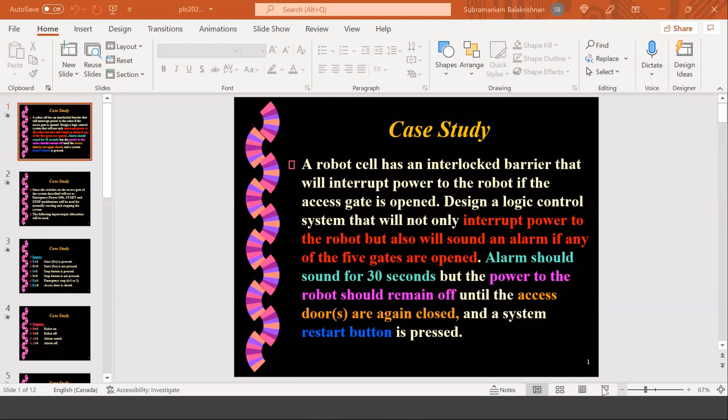Okay, let me go to this. Okay, do you see my PowerPoint slide? It's just loading for me right now. Yeah, now we can see it. I am not sure whether I want to be an IT guy, sort all this out. This is the stuff I hate about the online stuff when I'm using so many different things. It wants to screw me up.

Okay, I'm going to present the last section on the PLC that I did not do as part of my first 3 sets. This is the 4th set. What it is going to show you is how the sequence dependency of the ladder logic may cause problems in only a few cases. So you got to watch out, it could be even your own project number 3. Okay, so let me give you one example.

So basically I have a robot cell. Let's not worry about what's happening inside the cell. Some process is going on and the robot is the principal assembler or loader or whatever. We don't care about the process inside.

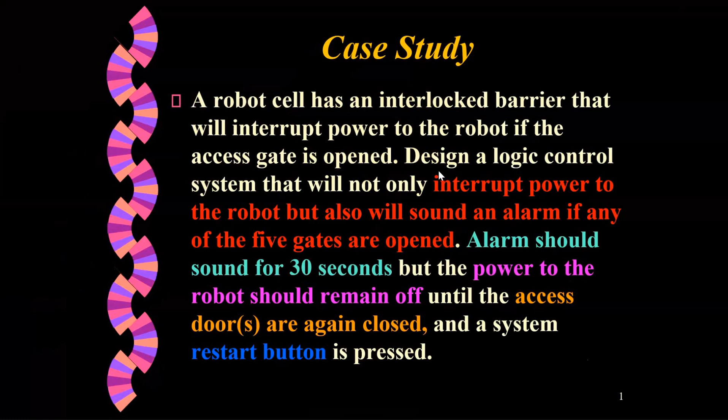Very simple. We are only looking at the safety system in the system. So like before, we are not going to go and do an exotic truth table or whatever. Let's look at what the sequence dependency is.

So all the safety switches are emergency power offs. There are many alarms inside the robot cabinet which can be wired to external monitors. For example, my 2 robots, Motoman, that I'm currently using for undergraduate courses has got close to 484 alarms inside.

In the sense, they're all in the controller. You can wire them up to give you a display, and they have wired them up into the screen, putting out what that alarm is. There is an alarm and it is stopped - what does it mean? So if you know what that error code is, you can debug it.

An example would be: the robot's sensors are constantly powered, like the shaft encoders on each axis are always kept alive, even if you power it off. There is a battery that powers and keeps the memory going. When the battery goes down, typically about 2 to 3 years, unless you wake up ahead of time and as a prevention keep changing the batteries, it will come up with an alarm and it causes a lot of other headaches. So there is a code for it.

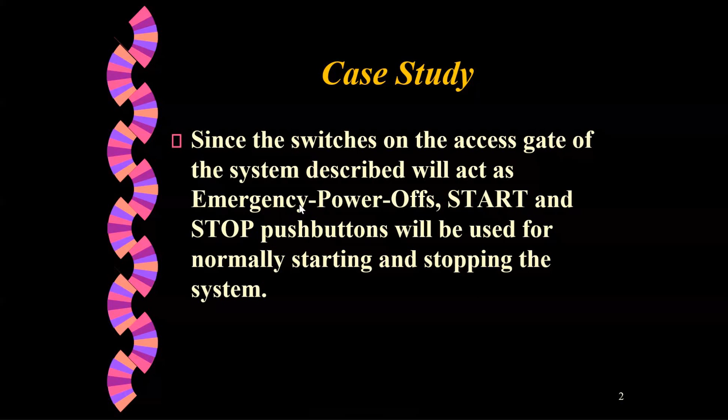Like this, there are many codes about the heating of the cabinet, heating of the controller, heating of the motors, and so on. So quite a lot of alarms are there, but right now we are looking at only one. So there is a start and a stop push button for starting the process normally after a shutdown or whatever.

Okay, so let's look at what the inputs would be. One, the start button, 'go', is pressed, equal to 1. When the go button is not pressed, it bounces back, so this is a momentary on-off switch. Only the go button, which means on switch - I'm going to call it the variable G.

Then there is a stop button. The stop button is independent of the start button, and it has got two states. It's also a spring momentary on switch. S equal to 1 and S equal to 0, again, as it says, pressed and not pressed.

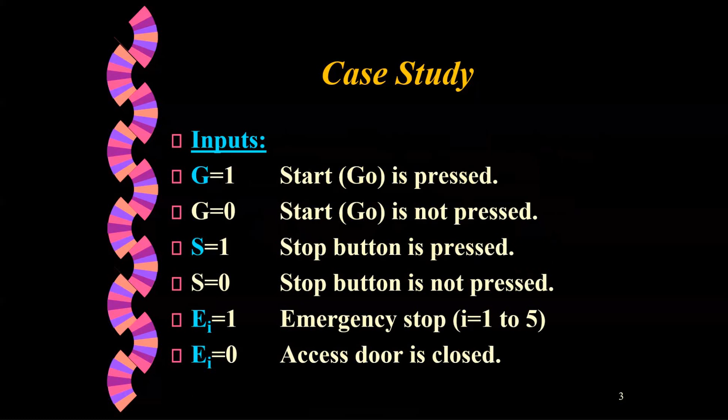Then you have 5 gates, each one has a sensor. So I'm going to call it E subscript I, equal to 1 or 0, and the I would take the values of 1 to 5. Would I be considering more? Well, I can consider more, but right now, to make the problem simpler and to show you the sequence dependency, I'm not introducing more. I'm not even considering the process.

Outputs: I'm going to put a variable R to tell me that the robot is going to be on, equal to 0 when it is off. And I'm going to have the alarm, light or whatever, equal to 1 when it is sounding or lighting up, or 0 when it is off.

The alarm is going to be a net effect of any one of the emergency gates being opened. All that you need is one gate to be opened, boom, alarm should come on.

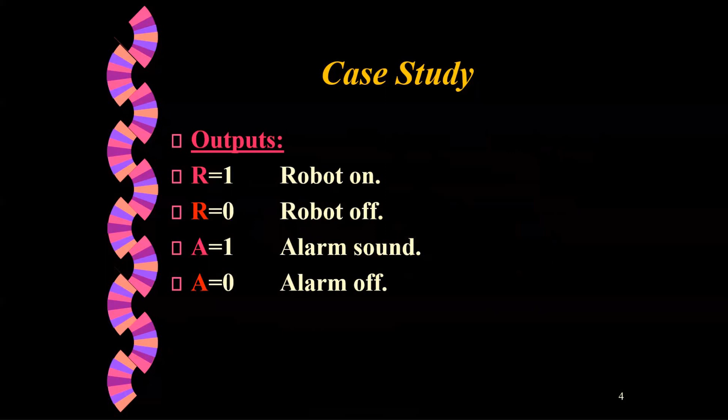I am going to put some internal outputs, and the internal output in this case is going to be a timer, because we said in the opening statement the alarm should sound for 30 seconds and then quit. So I am going to put a timer as an internal output, equal to 1 when the timer has expired, meaning it's powered up, and t equal to 0 when it is counting down or not even activated.

Having got this, just proceed to getting the equations. First, you have the emergency on or off. So emergency E, one single variable coming out of the 5 subvariables, would be either E1 or E2 or E3 or E4 or E5, not and.

One of them are. We can use a number of different ways: not E equals E1 or E2 or E3 or E4 or E5, not. Or using De Morgan's law, you can also express it as not E equals E1 not, and E2 not, and E3 not, and E4 not, and E5 not.

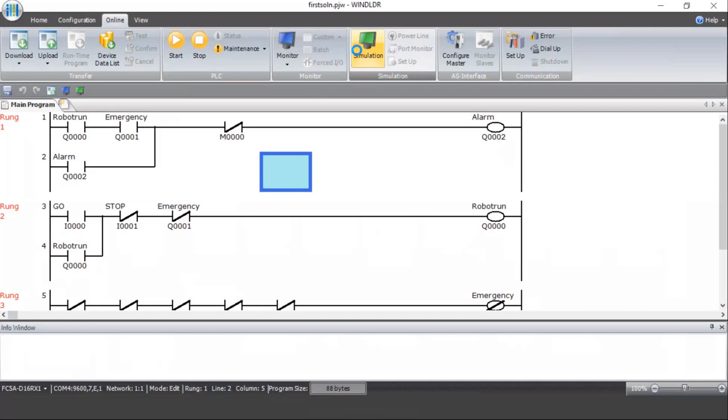Okay, so the screen has opened up with whatever that is true. I'm using an internal output M followed by 4 zeros in place of normally using the timer as a direct input. I am going to use it to trigger the timer. Okay, so nothing is on.

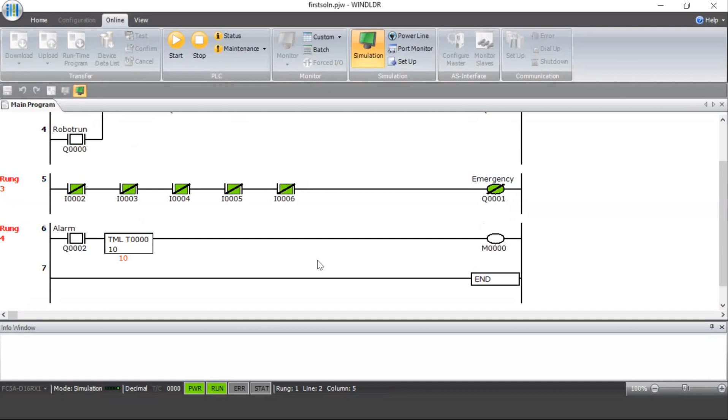Emergency is not true, or not on is true, as shown here in green. So what should I do? I am going to get the go button going. The stop button is not pressed, emergency is not on, robot is not running, which is in the third and fourth ladder. So the robot arm is not powered.

So I'm going to press the go, momentary on and off. I switched on the I followed by four zeros, which is the go button. I switched it on and got the robot arm going, robot run output Q followed by four zeros. Nothing else is on, so the robot is happily running.

And I walk into the cell. Look at the timer, it's got a value of 10 instead of 30 seconds, I only put 10. We can change it. So I'm going to open gate number 4, which is I followed by 0005.

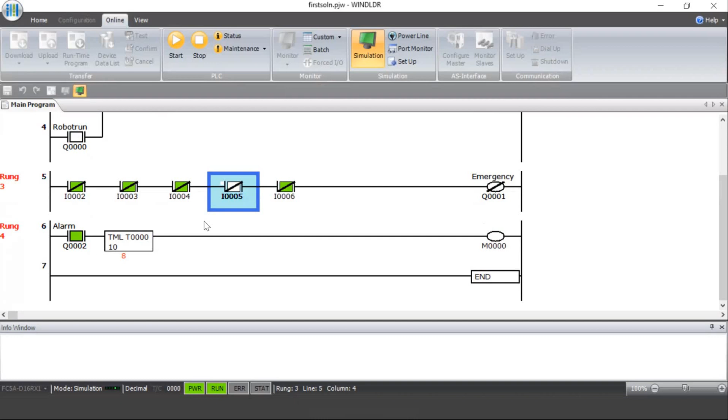My alarm is going to come on at the top. Okay, timer is counting for 10 seconds. Let me do it again. Now the timer has expired and the alarm has quit. Let's do it again.

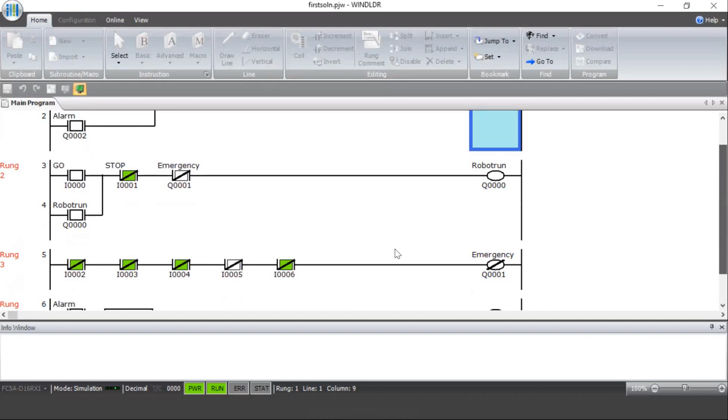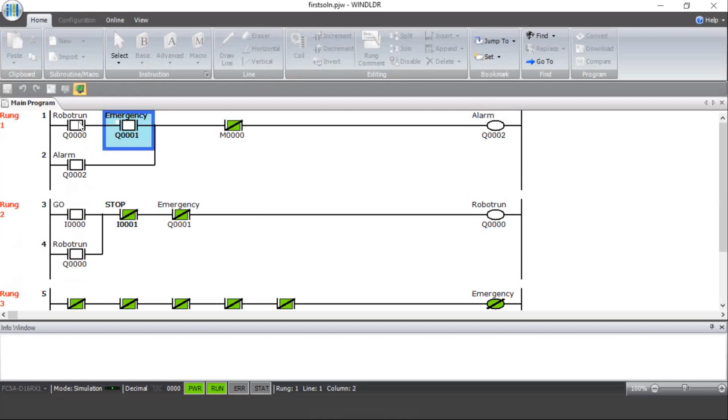I'm going to reset everything. I'm going to close this door. No emergency on. Is anything else on? No, the timer has bounced back to 10. So let's go here and get the robot going, and switch it off. Robot is running, this would be seen.

Why is it not running here? Okay, so the stop button is pressed. Emergency is not on. Let's get this going again. Yes, robot is running now. I switched off the go button, and since I took my hand off, the robot is running.

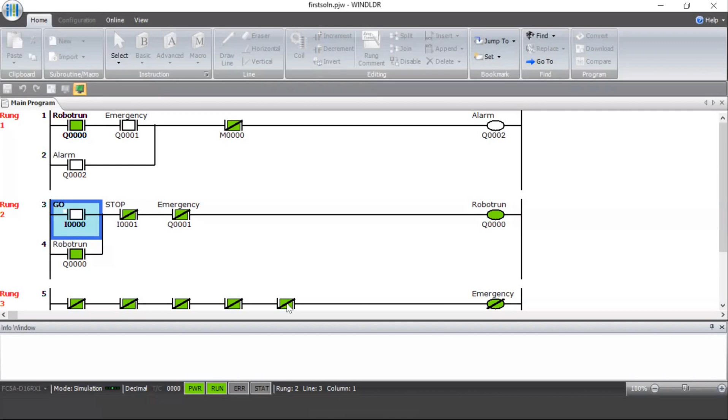No alarm. Okay, I am going to trip this switch now. The alarm has come on, as you see right at the top. How long? Oh, it's going on and I have not closed the gate. Okay, the alarm has quit after 10 seconds. So let's do this again.

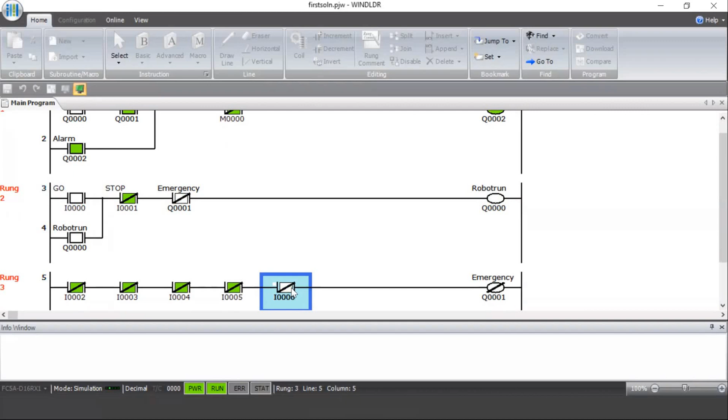I'm going to close this gate, get the robot going again, then quit and open this gate. Alarm is coming on and I'm going to close the gate. What happened to the alarm? Yeah, it's still on, it's counting 10 seconds. So even though I reacted quick, the alarm kept going. This could be logged into the computer as an event, if you want.

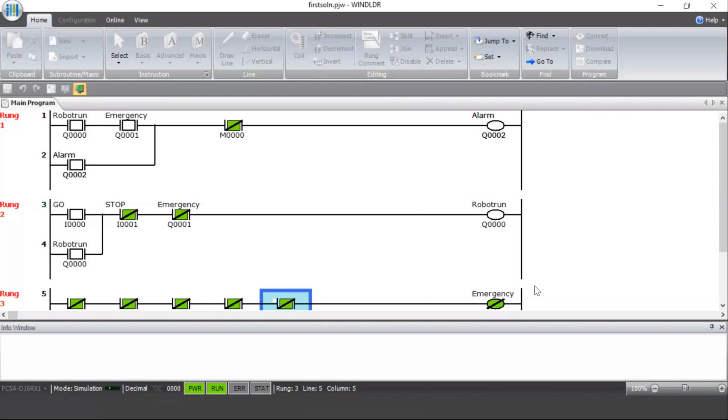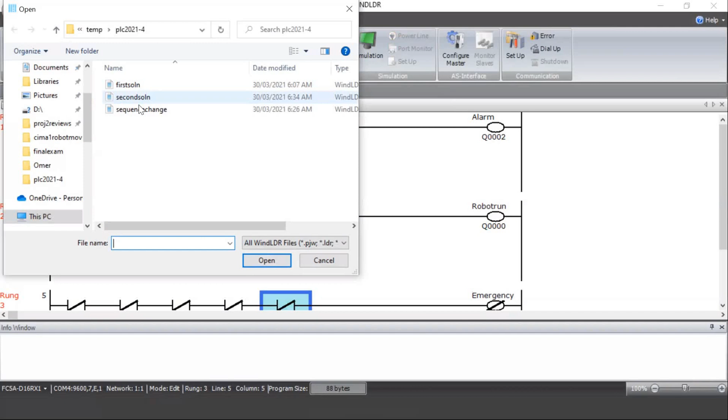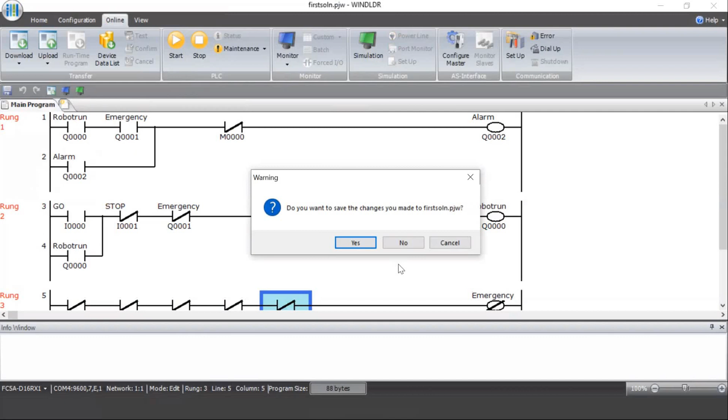Now let's take the second solution. I am going to pull my second one. First I do the sequence, I will do the sequence change in the end. So this is the second solution, look at rung 1 and 2. No, I don't want to save. Rung 1 and 2 are joined together. Unlike the previous one, it is now joined as Robotrun and alarm.

So I'm going to run this program. Well, it's still loading or doing something. Okay, simulation. Where am I? All the gates are closed like before. I come and start the robot by pressing the button. Yes, Robotrun is alive. No emergency, no alarm, everything is intact.

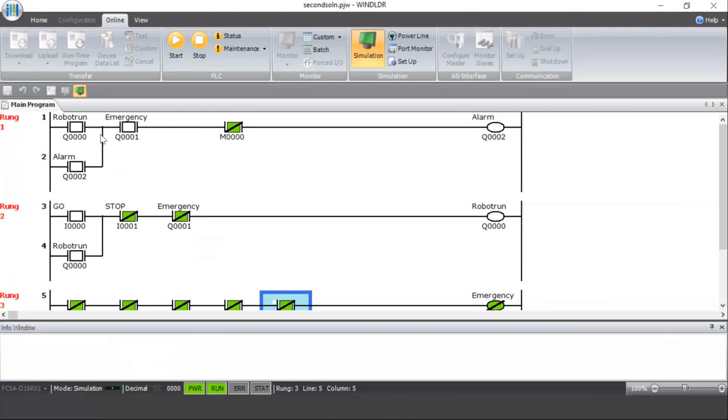Okay, now I want to just show you this screen. I'm going to open the gate now. Alarm is on and I'm going to close the gate immediately. Alarm went off, it didn't wait for the 10 seconds. As soon as you close the door, the alarm goes. Just this little modification here does the job. Depending on which one you prefer, both are correct.

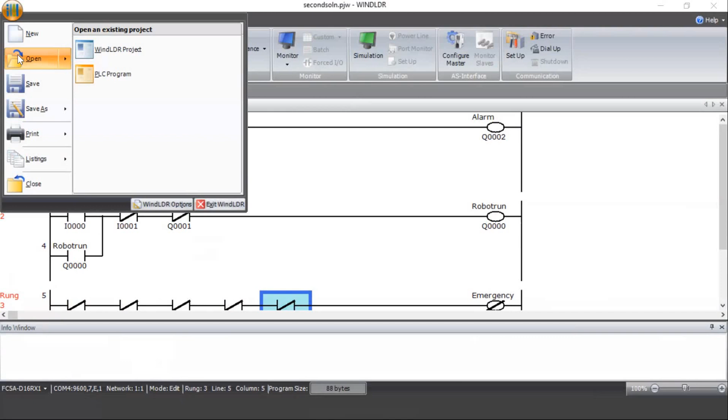Okay, now comes the next one. Sequence change. Now I like what I had presented in my PowerPoint slides. I shifted the emergency line, it's right at the top. Okay, so let's do the simulation of this.

Simulation. Okay, so all gates are closed, no emergency. The go button is not pressed. Okay, so I am going to put the go button first. Robot is not running. The alarm has already come on. Timer does not even play a role.

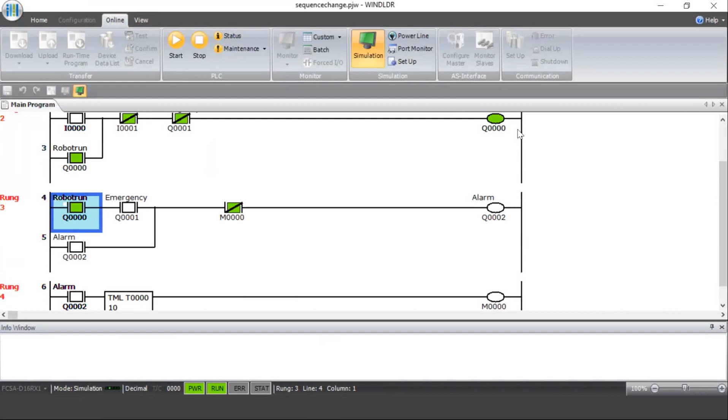Wait. Yes, the robot has come on. Now I am going to press this stop button. The robot has quit, good. So it should behave. Now I'm going to get this go button going again, switch it off, robot arm is going. Now what am I going to do?

I'm going to close one of these gates, rather open one of these gates. Robot arm quit, no alarm. So somebody messing with the system, I won't even know that it has been tripped. Okay, so no alarm because this one controls now everything, and because that emergency is coming into this line, it did not even trigger the alarm.

What happens if I close the door now? Well, you can now mess the system without being noticed, without being responsible for whatever was going to happen inside the system that got screwed up because you opened the gate and the process got terminated. And if this was the ladder, if you didn't know how to get the robot going again, you just open the gate, that's it. It's going to remain dead. Nobody would know unless somebody walks by, because the alarm never came.

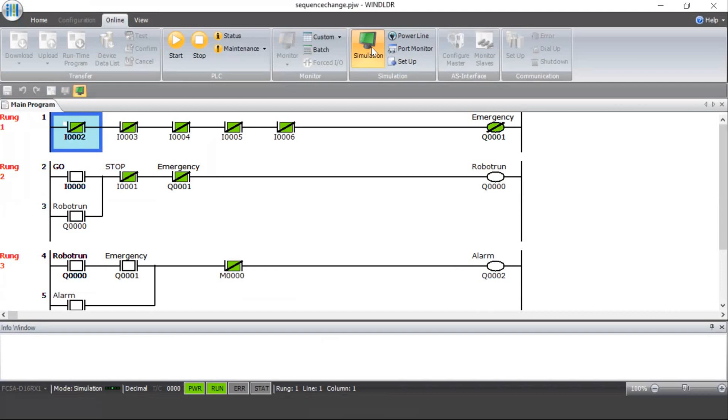As I say, this is not something I can statistically say will happen 50% of the time or 20% of the time. As far as I know, it's a very small percentage, but if something doesn't work, you have to watch. You have to look at the logic to see whether it's messing up somewhere. There's not a whole lot of this stuff in textbooks at all. They're all coming from whatever I have collected. So there's no example where I can say, go read this reference and you'll see more examples. It's something you should be aware of and watch if you're going to be involved in some PLC implementation.

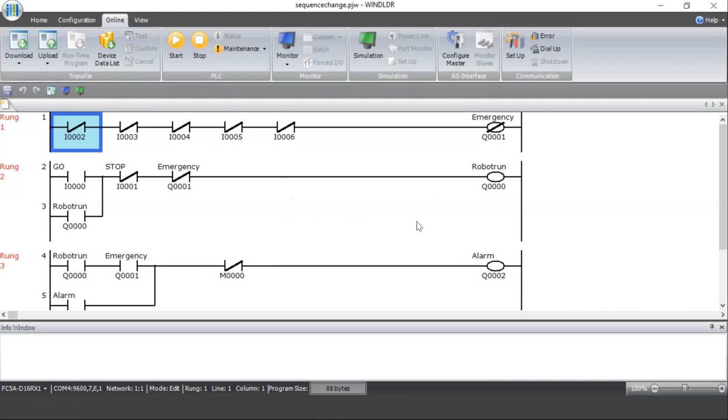It's too bad I got the video stuff messed up, but I will definitely bring it back on Tuesday. I'm going to see what exactly I should do. Maybe I can't play all of them together in one shot. I didn't open all of them today. Maybe I should try now. See whether it's still alive. Well, on screen I see it. Okay, I have to do the share first. Share content. A Windows Explorer window. I'm not sure whether putting them all in one subdirectory is causing the headache. Let me open this. Tell me whether you see the video on the screen. I did share. Should I share just that slide? I don't...

Did you see a video presentation of a robot spraying something? No, we can't. You didn't. Okay, let me try one other route. Is it?